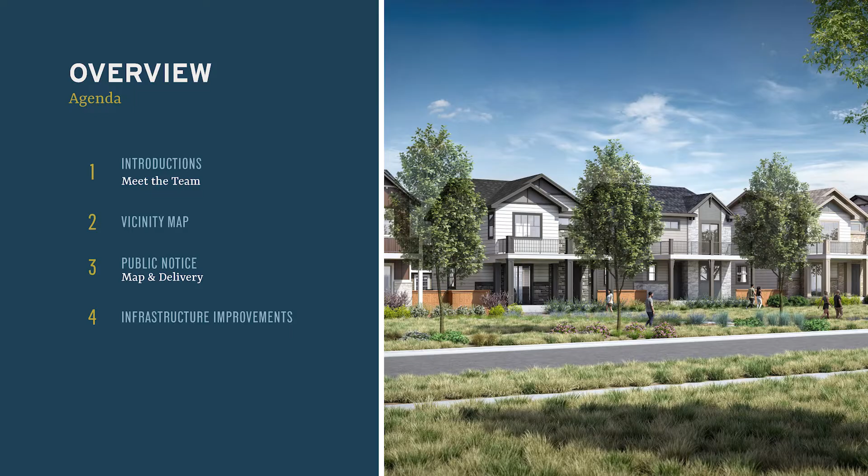Just an overview, a quick snapshot of where we're headed tonight. You already met our team, this team has all been involved since the beginning. We're going to talk about the vicinity map, the map of your neighborhoods, this infill site, the farm, going through that and talking about it. The public notice, really scoping who was notified to be here, your participation, and then most importantly, really detail these infrastructure improvements.

Here is the public notice. So these show the different parcels of Uplands. I think you've all seen this map in many different forms. I've seen this orange one forever and ever, but these are the blocks. This is parcel A, this is parcel B here, so we'll talk a lot about parcel B. Down here, parcel C, D, and E.

So those are the parcels, but what we decided to do, what we thought was the right thing to do, was actually follow 1,000 feet of notice around the perimeter of the entire site. So we noticed just under 1,900 residents, 1,895, and we sent written notice of this meeting so we could have full participation from all of the surrounding and adjacent neighborhoods.

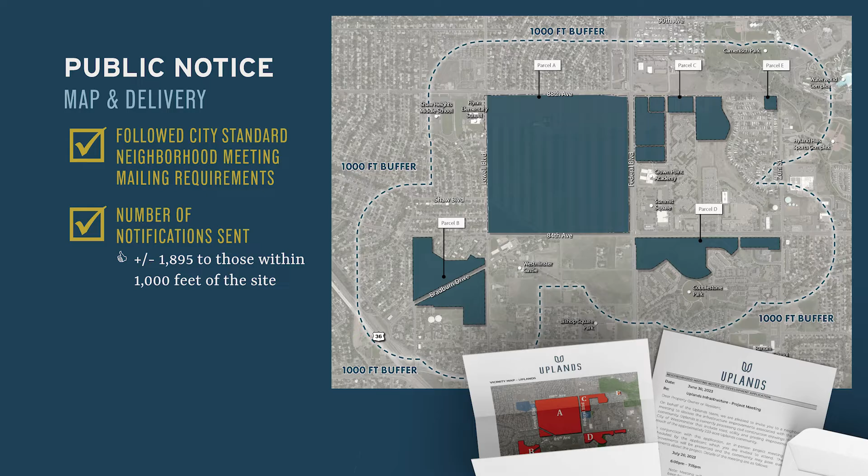This is an Uplands update. I want you to think of this as basically a dashboard. You're going to start seeing this on our website. This is a way of just tracking what we're doing and the process that we are in right now. So this is the infrastructure snapshot, to show what we're going to do here on the site. Most importantly, look at this legend, and we're going to walk through each one of these.

The red color are sanitary sewer improvements, sanitary sewer drainage improvements. You can see right there into Shaw Heights where we are making those improvements. We're going to talk about that.

The blue are water improvements and upgrades. Water lines, water infrastructure, that goes throughout most of Parcel A. Certainly comes into Parcel B as well, but we are starting with water improvements on the A site. So all of those lines that you see there, that basically follow our future streets, we are going to make those water improvements and upgrades.

Finally, storm drainage improvements. All of you that live here near Shaw Boulevard or Circle understand existing flooding conditions, existing problems that have been there for a long time. We are making substantial improvements to that now before we build a home to make sure those improvements are there. So we're going to talk a little bit about those storm drainage improvements as well.

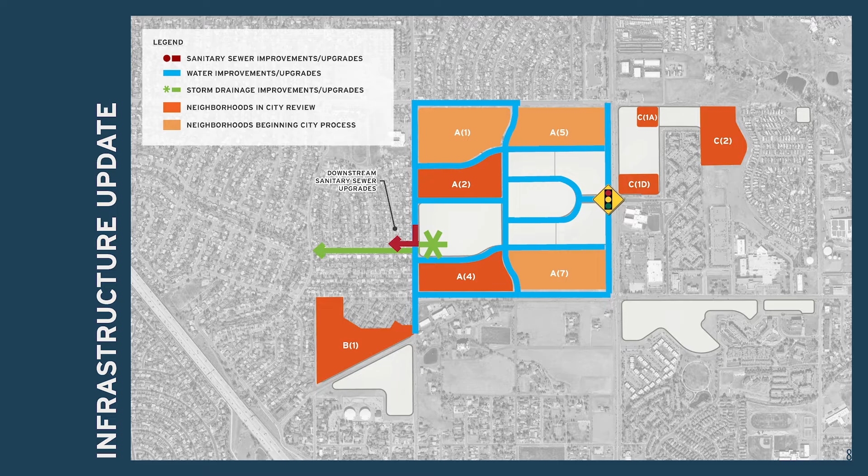The difference - the lighter orange - says neighborhoods beginning the city process. That city process can take 6 months to a year, but A1, A5, and A7 are commencing their city process, okay? And what we are doing on those are specific site plans - we're going through the site plans, the layout, the architecture, the homes, the neighborhoods, all of those things that will happen. So we're going to go into a little more detail, but this is really the most updated picture. I don't think anybody has seen this image yet of everything that is in process in Uplands. Uplands has commenced, it is commencing now, and we are moving forward first on the infrastructure before these neighborhoods are built and delivered.

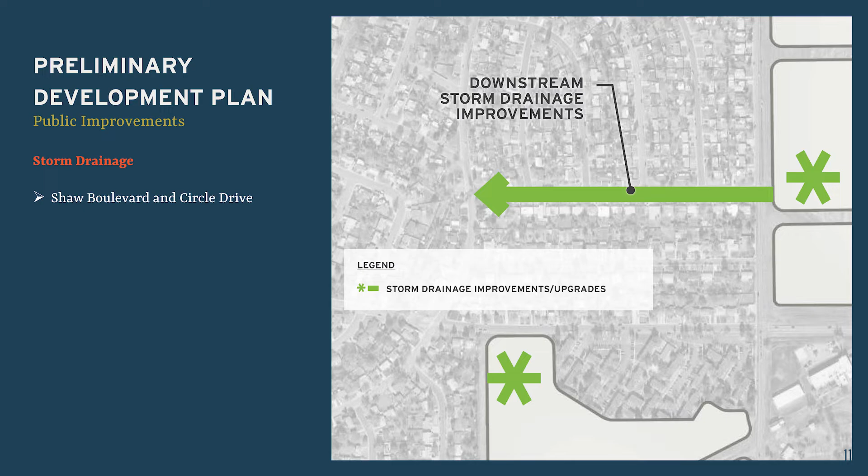Next slide. Bonnie Nigelli is our principal lead planner. She's going to walk us through the bike and pedestrian connectivity. This is a little harder to read, we understand that, and I apologize for that. But she's really going to focus on what we're providing, primarily parcel A and B here. Bonnie, can you walk us through this map and what we're providing?

Yeah, absolutely. Good to see you all again. So this map outlines a lot of the mobility pieces of Uplands. These orange and yellow lines are really focused on bike connections and sidewalk connections. Marcus, we were talking about the gentleman trying to bike down the non-sidewalk on Federal today, or if you've ever tried to get to the bus stop at Federal and 86, it's challenging - there's no place to walk. So part of this first phase of improvements is providing all these bike and sidewalk connections so that you can all get to the places in your neighborhood that you can't get to today by foot or by bike.

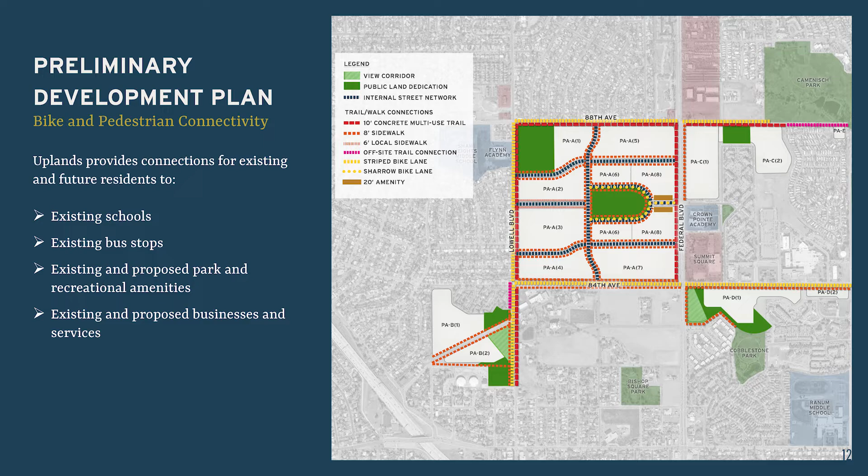Next slide. Another key piece of this is the public land dedication. This is in two different parts. First, the dark green is two public land dedications that will be developed as parks - that's a total of 34 acres. We are currently wrapping up the platting process, which dedicates those 34 acres to the city later this fall. On top of that, we have 6.35 acres of corridors, that's the lighter green color. Those are also being platted this fall and will be dedicated to the city. So the city will own all these light green and dark green parcels as soon as that dedication is wrapped up.

One thing I just want to add on this: 34.3 total acres of PLD, public land dedication, granted to the city, and then 6.35 acres of new corridor. That goes through a separate planning process, a city-led process. I do want to be sure and point out, within the individual neighborhoods there are, of course, additional open space - there are parks, there are pocket parks - but this is public land dedication, land that is dedicated to the city through that process.

Great, next slide. All right, Todd gets to walk through phase one improvements. So folks, again, the reason we're here - and Todd is our lead engineer on this project and has been from the beginning - we're here to talk about what you're going to see over the next number of months, those improvements we're planning commencing this fall of 2023. We're going to go through it again. I think we've got maybe 12 slides left, and then we'll be happy to go back and go through any questions you have for Todd. Next slide.

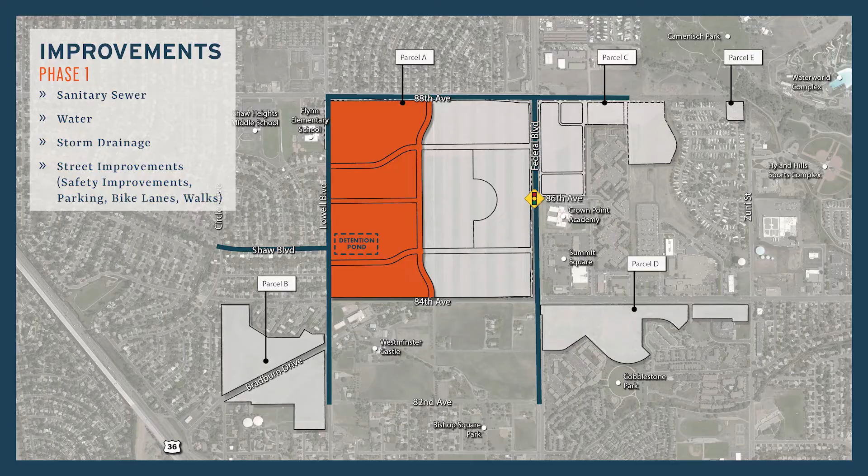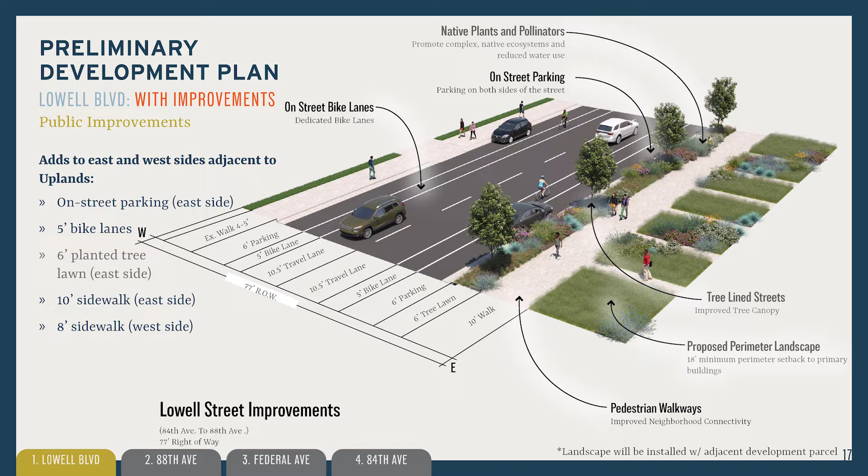The first phase - I'll go through a couple of roadway cross sections here. What you're seeing is Lowell, and what we're improving: you have parking on the resident side right now. We're adding bike lanes on both sides of the roadway, and adding parking to our side along with sidewalks.

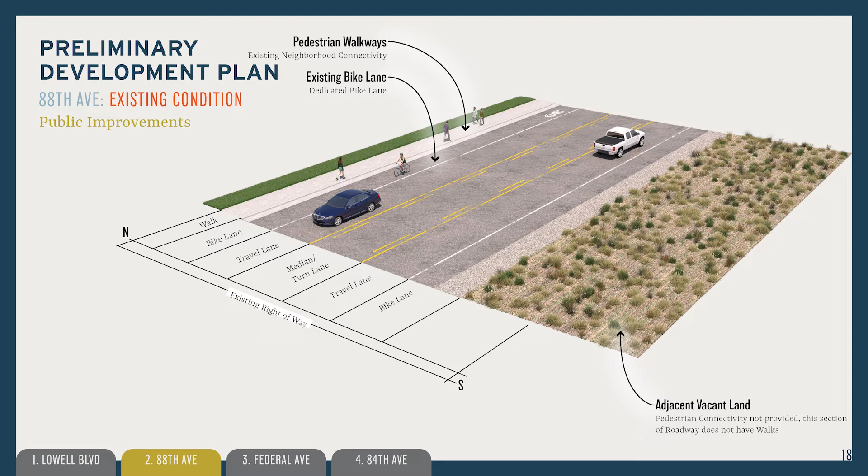This is 88th, a very similar situation, where the only difference is we have a turn lane in the middle being formalized, but we're adding parking, adding bike lanes, formalizing bike lanes that are out there, and adding a walk on our side.

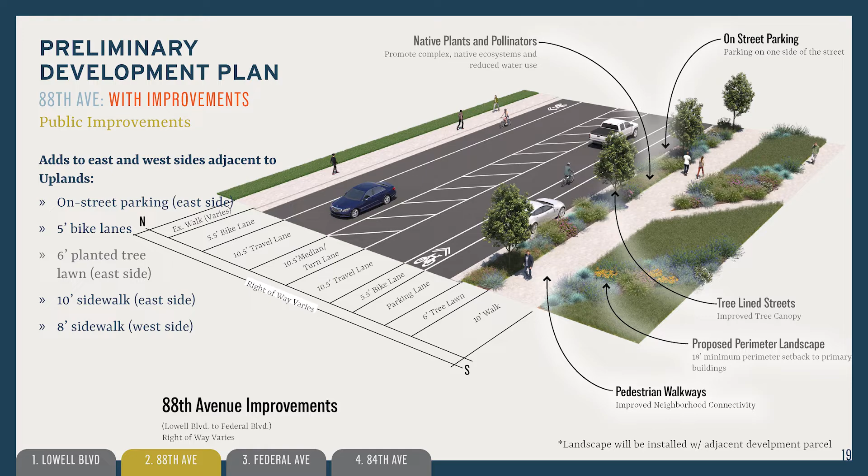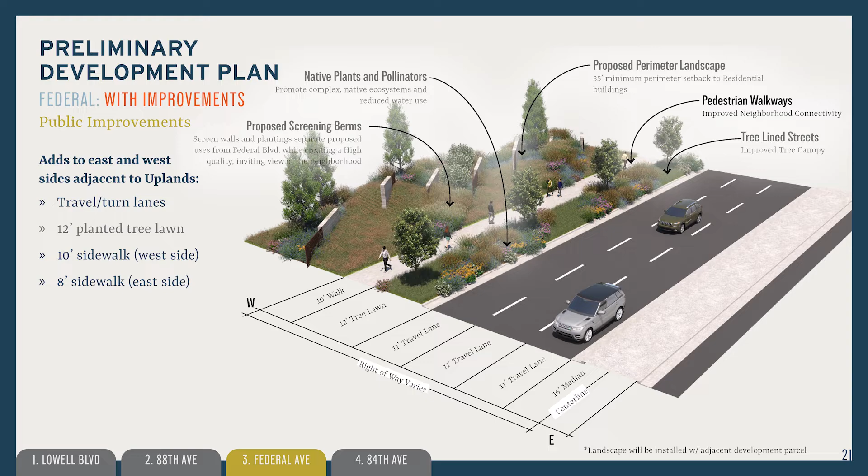Federal - really this is looking at improvements on our parcel or our side of Federal, but we'll have improvements on the east side as well. We're formalizing a shoulder that's out there today into an auxiliary lane, adding the walk on our side, and formalizing the turn pockets and turn lanes coming into the site. Along with that, we're upgrading or improving the signals at 84th, installing a new signal at 86th, and doing the same thing at 88th, improving that intersection. Additionally, on Lowell, we're improving the signals at 88th and 84th.

Phase 2 improvements: when we finish off the grading on the western side of the site, we'll be working on the storm drainage and roadway improvements, and also going on to the second phase of grading the eastern side of the site.

At the same time, we're probably going to be progressing from the Lowell and 88th improvements as those wrap up, and then we will go on to 84th and be working up and down Federal as well.

What we're really trying to do is keep the disturbance down to one east-west and one north-south roadway at a time. So if we're working on Lowell, we don't want to be doing work on Federal. We want to keep that in its current state so we don't have traffic problems any more burdensome than they are today. Then when Lowell gets finished, we move over to Federal.

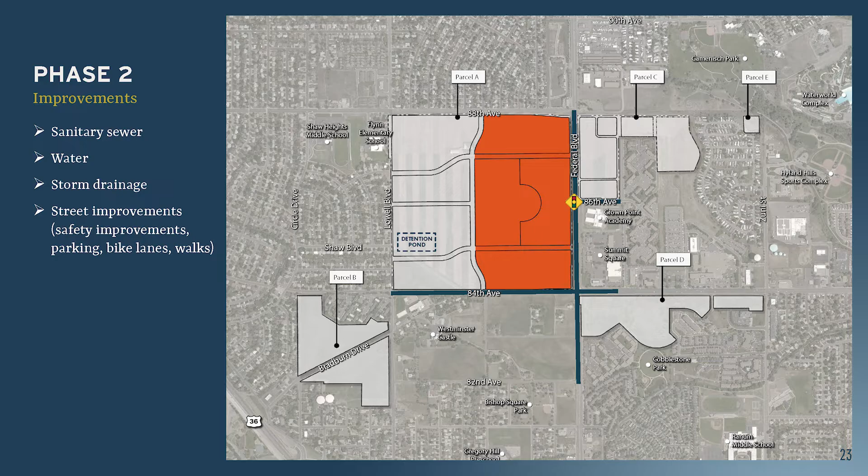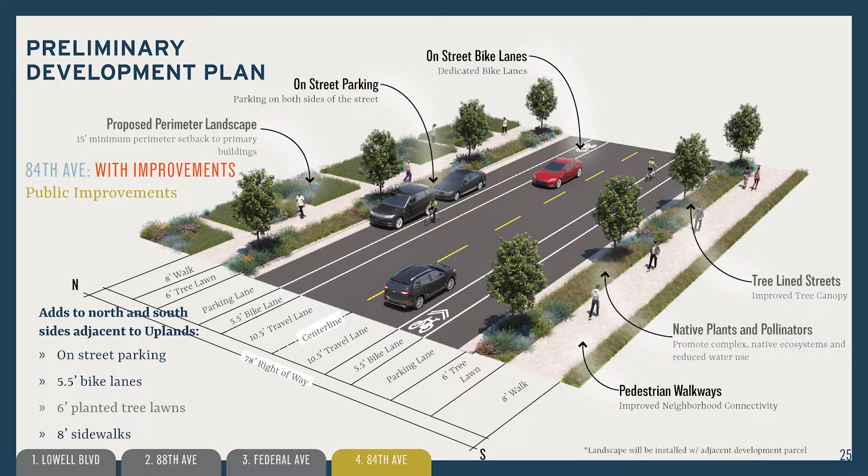Here you're seeing 84th, again just 2 lanes, adding bike lanes again, adding parking and sidewalks to that section.

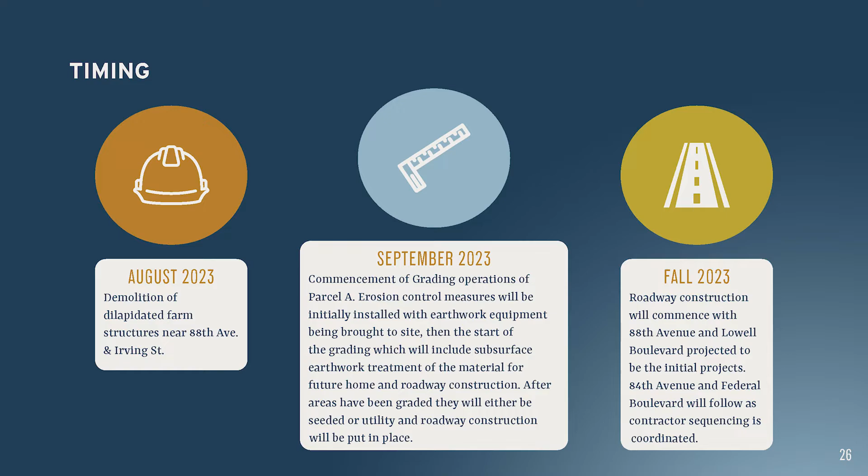I can go through a little of this. One more clarification - can you go back to the overall picture that we had? One clarification we wanted to make from what Marcus was saying, where we show the city improvements.

The city improvements, we are actually funding. There was a discussion earlier about us not paying for these improvements - we are paying for these improvements. Everything you're seeing in the core, these were requirements of us and the $40 million, but we are paying cash in lieu for those off-site improvements, and those improvements are being done by the city. There's also some off-site sanitary being put in place that you don't see on this map, and the other improvements you're seeing here that are highlighted, we are paying for. So we just want to make that clarification on one of the comments that came up earlier.

So yeah, and thank you. And actually stay there, Jasper - I just want to clarify if anybody had any questions about that.

The reason we put that box there, improvements by the city, means that goes through their contracting process. They have to go through that. Those are off-site - we can't go make those improvements ourselves. That is the customary process. When we're finished, we'll take questions. We have to fund those. We are funding everyone, and that's exactly what the PDP said. So it's the same process, the same agreement we've always had in place. We are paying for those improvements that'll be done.

Karen, we just have 3 summary slides, and then we'll move to questions. Just a quick couple of things - I'm not going to redo these slides, but we just wanted to, again, start.

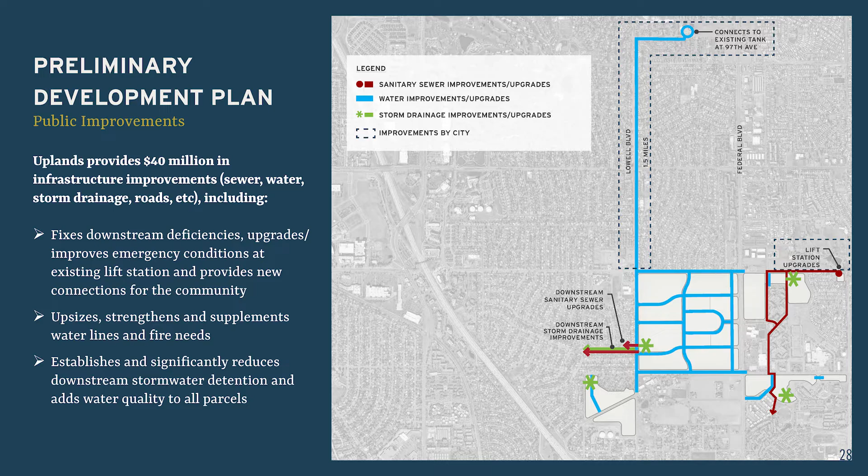That comes in with the application of the neighborhood plan itself.

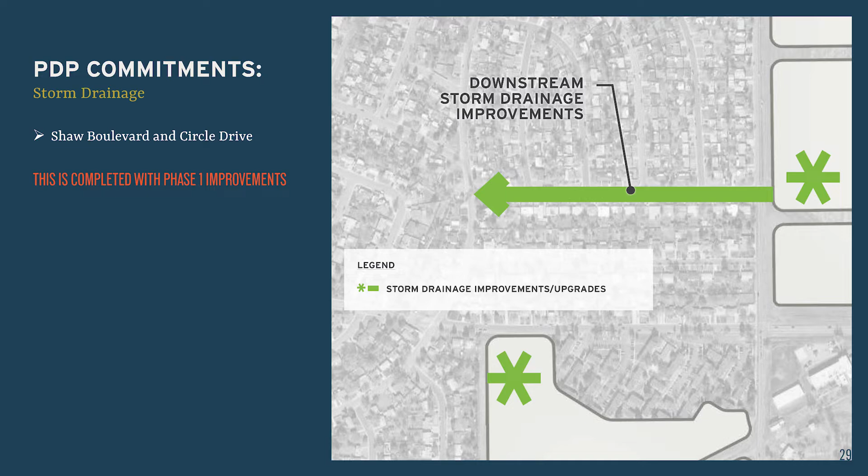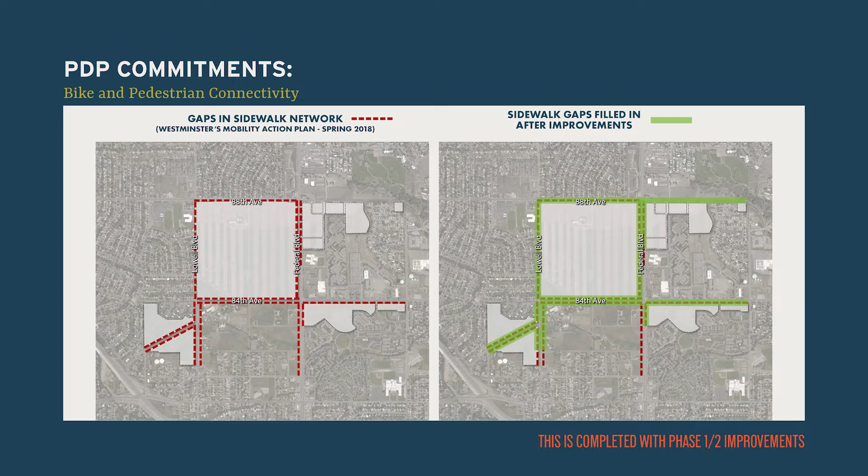Next slide. Okay, folks, you've seen this one. We're just going to go and use this as a transition to the question and answer. I do want to thank you for being very patient. We have a full team here to answer questions, and we're happy to go through them.

Mr. John. Yeah, there was no mention of any improvements over there at Bradburn Boulevard, and we were in the middle of something about the B parcel.

Sure, that's going in front of the Planning Commission next week. Yeah, I think we should be hearing more about that. And again...

Improvements, right? Sure, so I'll start and then I'm going to go talk. So Jasper, the question was about Bradburn Boulevard. So if you can maybe look at, I don't know, maybe Bonnie you'll know the slides best, which one to look at.

I just want to be clear about something John said. This parcel B1, we are going first to Planning Commission on. We already had a number of community meetings. We had the required community meeting on that project. You were in attendance at that meeting. We had that meeting. We go to Planning Commission next week. So we've gone through that process. We have a very detailed plan and we're happy to go.

So if anybody has any questions about that neighborhood, again, in compliance, you are correct John, and I appreciate your question. On parcel B, it's a great example, B1, that application contains the infrastructure improvements along Bradburn and internal to that site. So just as it's a great example, when we go through the neighborhood application process, the site-specific development plan, all the improvements where we touch that or internal, we make that during the process.

What is different about these are shared roadways that we think it's imperative that we make those infrastructure improvements, as did the city, as did neighbors, that we make these improvements before we start building and adding homes here. So that's the difference.

Yes, please, a couple of points. Sure. I would agree with some of the take that maybe these are improvements, because on parcel B it's full of sunflowers and wildlife right now. So what are you going to cut though? Cut your field, grading and improve it.